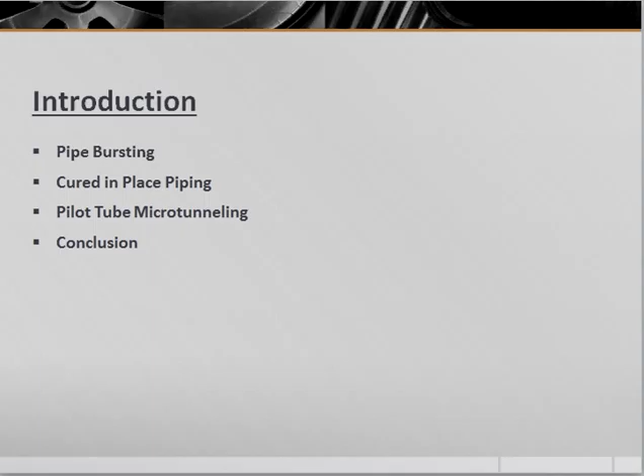Applications of Trenchless Technologies in Horizontal Construction. Group members Mary Haythorne, Clay Ebersold, and Chris Harbin. Today we'll be discussing three methods of trenchless technologies. First, pipe bursting, followed by cured-in-place piping, and finally, pilot tube microtunneling before we draw some conclusions.

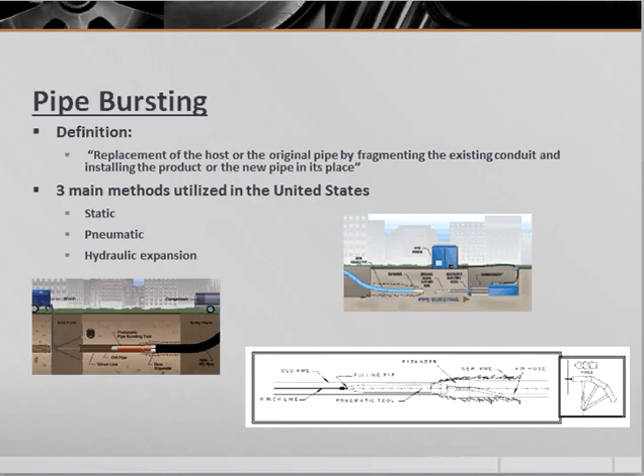Pipe bursting is defined as the replacement of the host or the original pipe by fragmenting the existing conduit and installing the product or the new pipe in its place. There are three main methods utilized in the United States: static, pneumatic, and hydraulic expansion. These pictures show the differences between the bursting heads.

The static method is achieved by pulling the pipe through the existing pipe by utilizing a cable, and the equipment is modeled after hydraulic jacks that are mounted horizontally. The pneumatic method is where a cable is inserted prior to bursting to maintain contact between the existing pipe and to guide the new pipe into place. A hammering force created by a compressed air system forces the bursting head through the existing pipe.

Hydraulic expansion is where the bursting head expands radially to burst the existing pipe. The head then contracts and moves forward in small increments, and the process repeats.

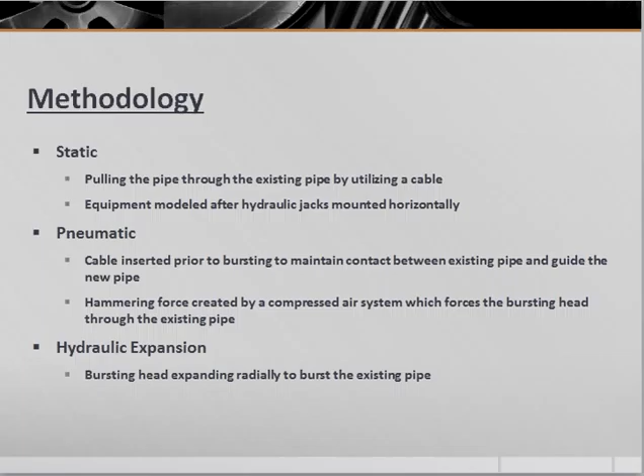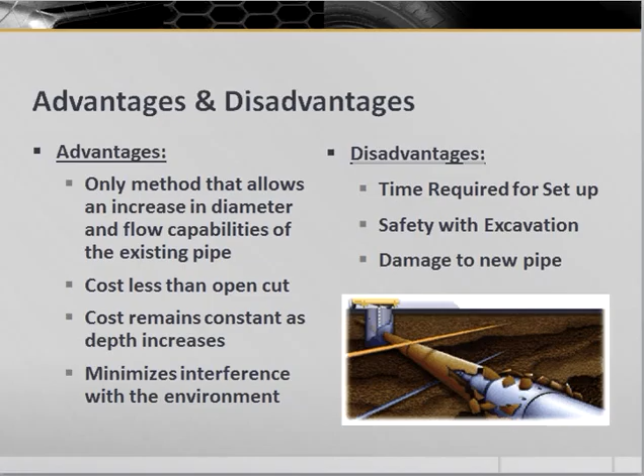Advantages and disadvantages. The main advantage is that this method allows an increase in diameter and flow capabilities of the existing pipe. It costs less than open-cut methods, and the cost remains constant as depth increases. It also minimizes interference with the environment. Disadvantages are the time required for setup, safety associated with excavation, and possible damage to the new pipe.

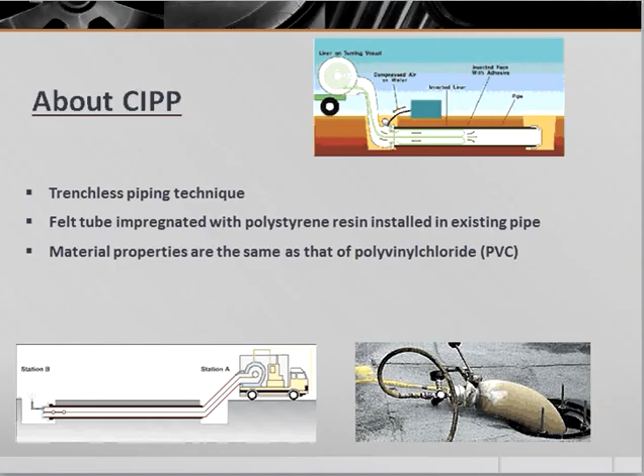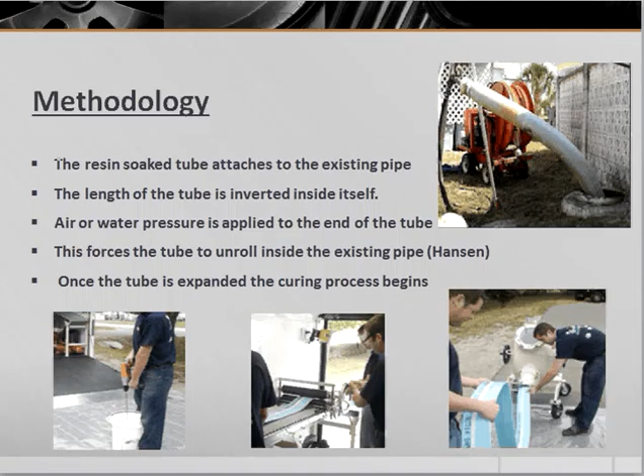Cured-in-place piping. Cured-in-place piping is a trenchless piping technique. The pipe is cured inside the existing pipe that needs replacement, and once the pipe cures, the material properties are similar to that of PVC. The piping is installed by attaching the uncured felt tube to one end of the existing pipe. The tube is pressurized and unrolls inside the existing pipe. Once the tube has expanded, the pipe is allowed to cure. This may take up to 30 hours, depending on its size.

Cured-in-place piping is usually quicker than traditional pipe replacement. This is mainly due to the fact that a complete excavation is not needed to install the pipe. Unfortunately, the material needed for cured-in-place pipe is usually not kept in stock locally, so it has to be ordered. Also, cured-in-place pipe does not allow for an increase in pipe size.

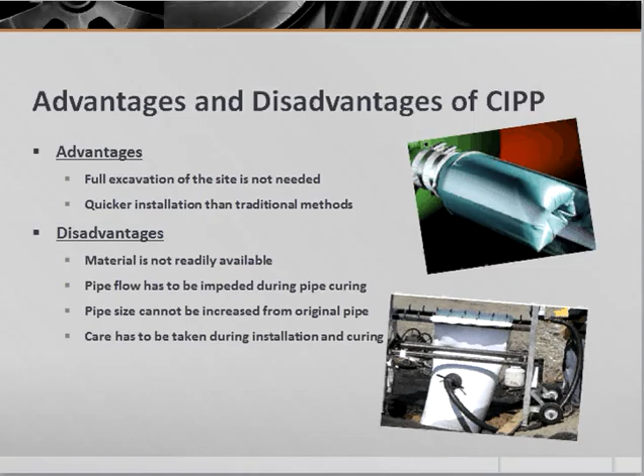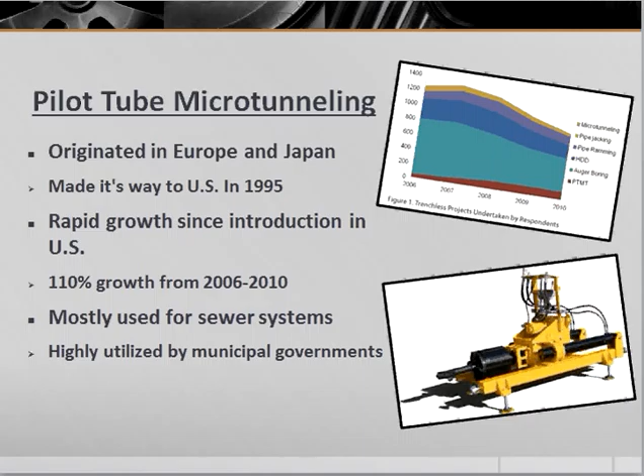The way it works is two jacking and receiving pits are dug on either side. A steering head with a camera allows for the operator in the jacking pit to see what's going on at the head. A borehole is then enlarged, followed by auger casings that are installed. The auger casings follow a reaming head and are attached to the rear of it. The product pipe is finally installed, much in the same way that the auger casings are. The product pipe is always equal or lesser diameter than the auger casings and can be up to and above 48 inches. That is a three-step method.

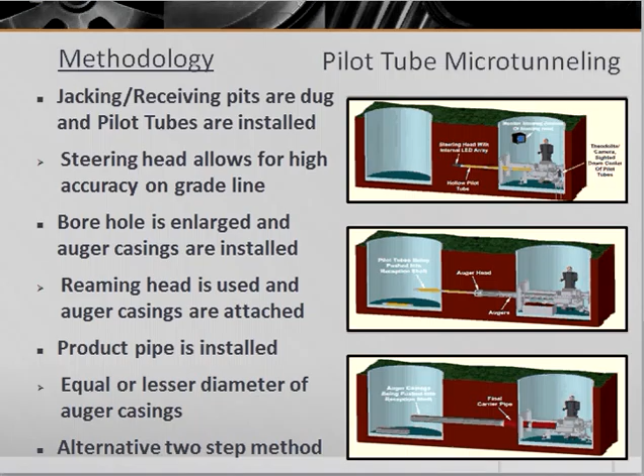However, there is an alternative two-step method that some contractors prefer because it combines the second and third steps by using a special reaming head sized to the diameter of the product pipe. The advantages of pilot tube microtunneling, also called PTMT, are that it is highly accurate on grade line, down to the inch. It also leaves a small footprint, seeing that most pits are no larger than 10 feet in diameter. There's also a relatively small impact on surrounding operations, which can result in no lost time.

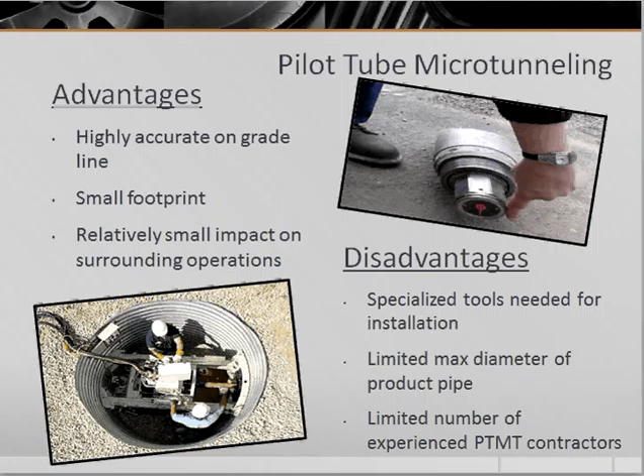However, the disadvantages include that specialized tools are needed for installation, such as a powered cutting head and a powered reaming head. There is a limited maximum diameter of the product pipe, which is relatively small when compared to other trenchless technologies. There's also a limited number of experienced pilot tube microtunneling contractors in the United States.

In conclusion, pipe bursting is the only method that can increase the pipe size from the existing and is meant as a full replacement method. Cured-in-place piping is mainly used for sanitary sewer and water distribution piping. It also minimizes the site disturbance and is a relatively quick fix compared to the pipe bursting method.

PTMT is an ideal choice for sanitary sewer and storm sewer applications. It works well in very confined spaces and is extremely accurate on grade. It is intended as a method for laying new pipe systems.